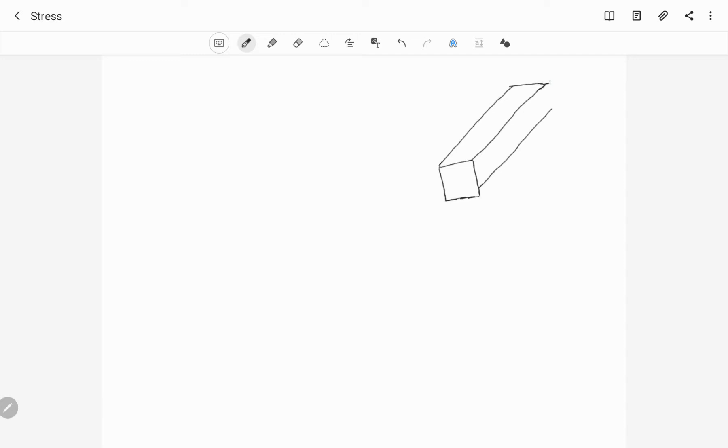So let's start. Basically I just want to explain where we derive it from. So let's assume that we have a cubic member, okay? Let's assume like it is like this, okay? Excuse my drawings a little bit. So let's assume that we have this shape here, okay? And sorry, let me just fix this one here. All right, and we have a power or a force pulling on the side, okay?

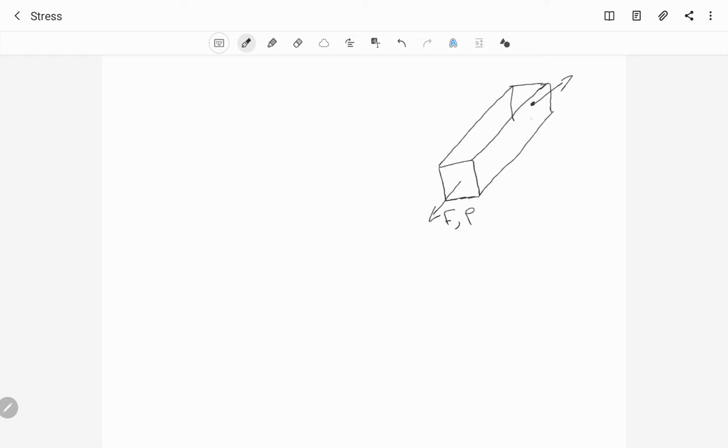F, or basically P sometimes. They call P as pressure and F as just force, and another force pulling from the opposite direction, okay? So basically it is like this, another force pulling on this direction, okay? So what will happen, what will this body experience? It will experience a stress within it. Basically the stress is to keep it from deforming.

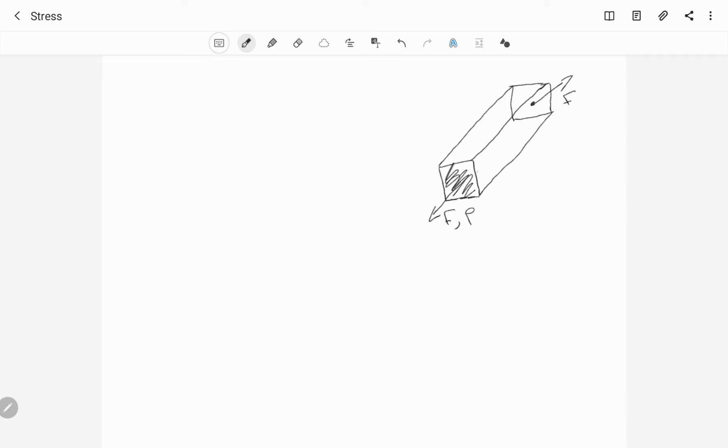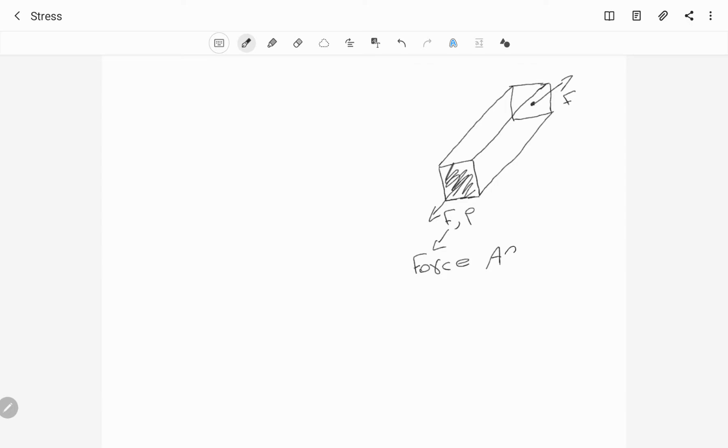Now how do we measure this stress? We measure it by taking the area of the member, okay, and the force that is applied, okay? Force applied, okay? And after we take them, basically, we're gonna use this formula.

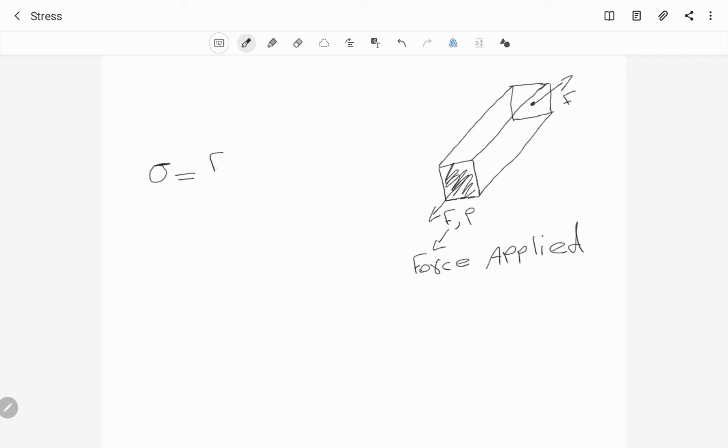This symbol called sigma, or basically sometimes, sorry, like let me just write it better. It is written something like this, yes. Sigma equals the force or pressure divided by the area, okay?

Now make sure that whenever you, no matter what units you are given in the question, because sometimes the force will not be given directly by Newton, will be given by kilonewton or by meganewton, let's just say. Make sure you convert it into newtons before you apply it in the formula, in order for you to get away from any confusion later during the calculations. So this is for the force. It's just as an advice, as a tip, make sure to change it into newtons, not kilonewton, not millinewton, not meganewton, when using it in the formula.

And for the area, it must be in meter square. And why I always tell my students to make it in Newton over meter square is so that they can immediately write it as in Pascal, because we measure the stress in Pascal, okay? And remember this symbol here is called sigma, okay?

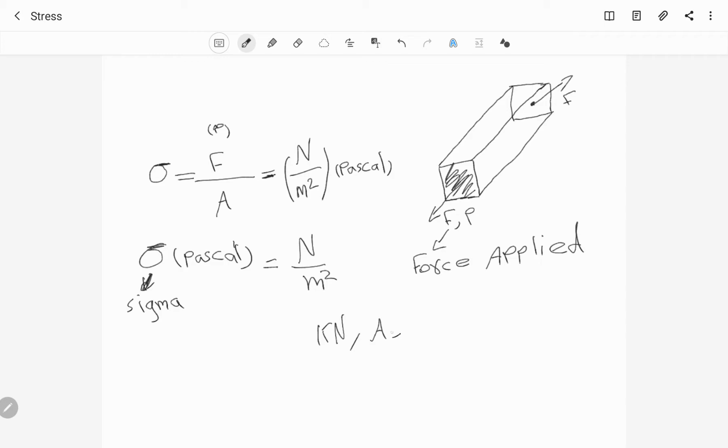Pascal equals exactly Newton over meter square. But sometimes in the exams you will be given like kilonewton, the force will be given in kilonewton, and the area will be given in like millimeter, okay? Basically they will give you the length of one member and the length of the other one, and they ask you to multiply the two of these, let's say A times B, in order for you to get the area of the member. So sometimes it will be given like millimeter by millimeter. So this will get you to a confusion later on when you're gonna write the Pascal. Let's see right now in the example what I'm meaning.

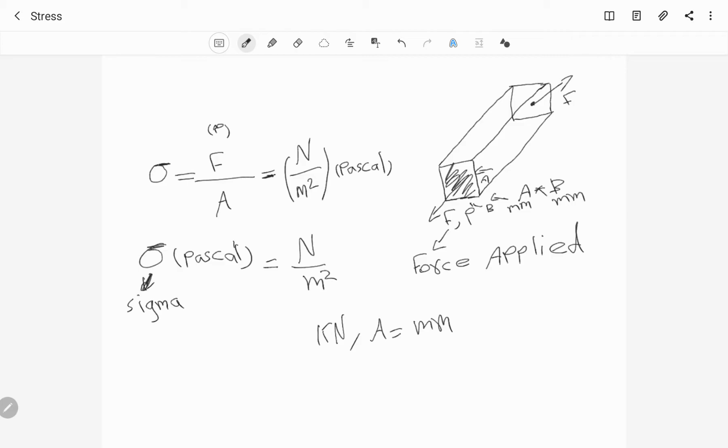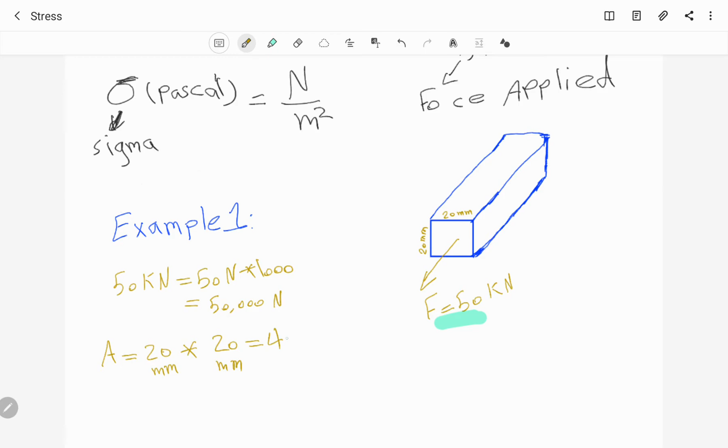So what we will do is we will change the force to Newton, which is 50 kilonewton equals 50 Newton times 1000, which equals 50,000 Newton. Okay, now for the area we have 20 millimeter times 20 millimeter, okay, which will equal 400 millimeter squared.

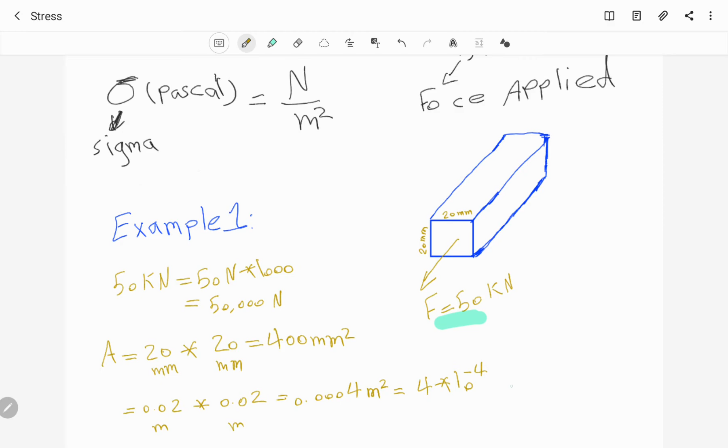Now for this one to change it, we basically gonna write it in this form. 20 millimeter is 0.02 meter times 0.02 meters, okay, which will equal 4 times 10 to the power minus 4 meter squared.

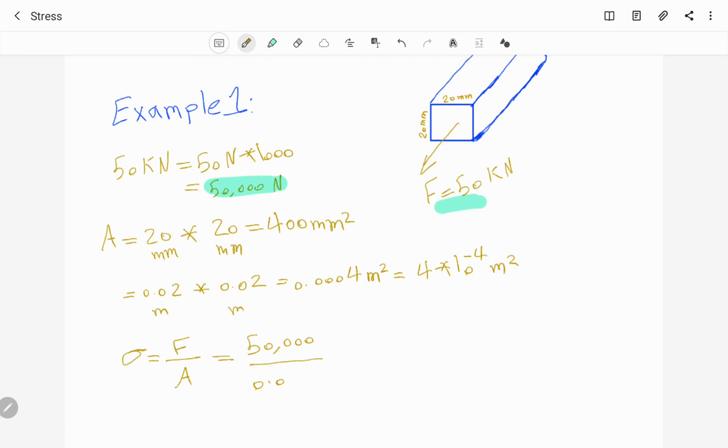Now let's use the formula to calculate the stress. So we have sigma stress equals F over A, which equals, we have F, which is this one right here, 50,000 Newton, divided by the area, which is 4 times 10 to the power minus 4. Or let me write it in this form, 0.0004.

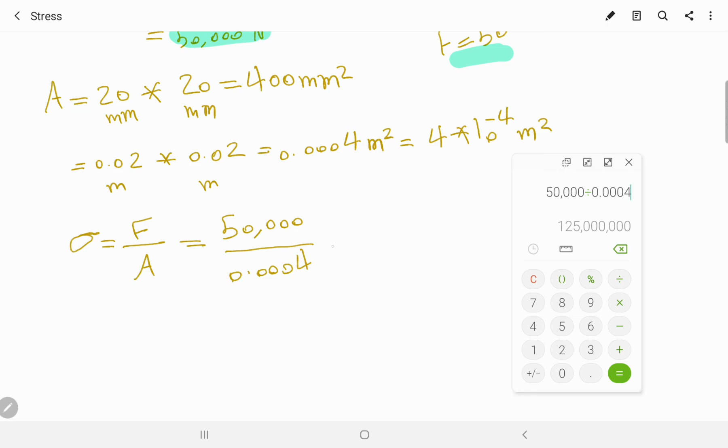So let's plug in these givens into the calculator. Basically 50,000 divided by 0.0004, this will give us 125 million Pascal, which we will write as equals 125,000,000 Pascal... in other words, it is 125 megapascal.

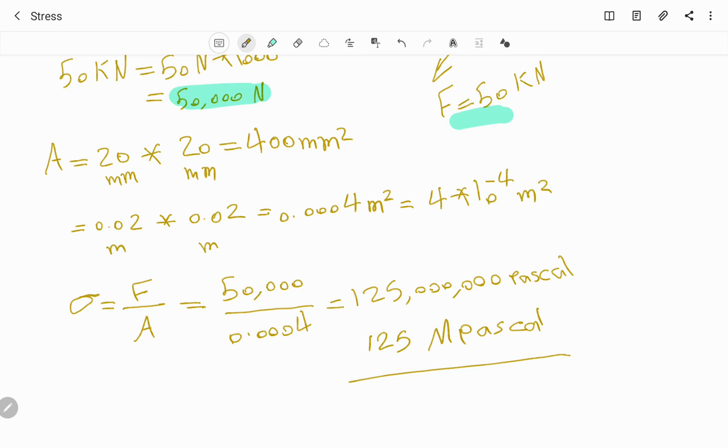So this is our solution. Alright, so you can take a screenshot of this to save it for you later as a note. So thank you for watching and have a good day.